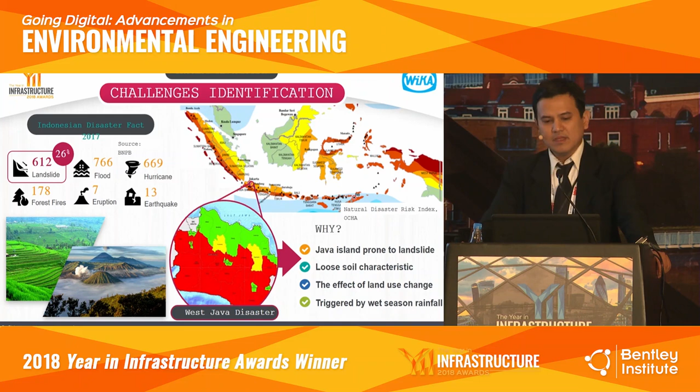If you see this map, the red color is the risky area for disaster. Based on data from the local government in 2017, there are 6 sources of natural disaster, and landslide is the third biggest cause of natural disaster.

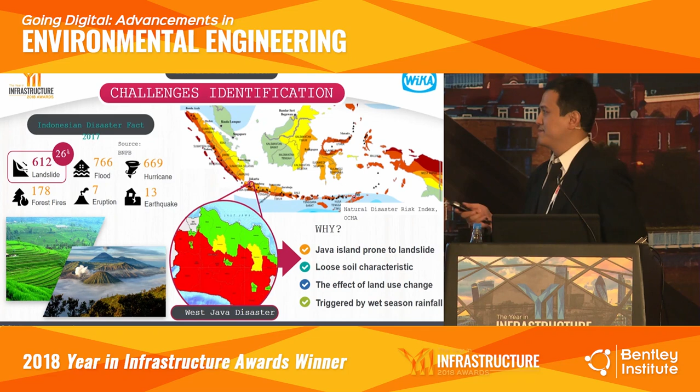Why can landslide be the third biggest cause of natural disaster? Because there are 4 causes. First, Java Island is prone to landslide. Second, loose soil characteristics. Third, the soil effect of land use change - Indonesia is a developing country, we change forest to agriculture area, we change forest to commercial area. And the last is triggered by wet season rainfall. These are the 4 reasons for so many landslide disasters in Indonesia.

Okay, next, project location. Our project location is on the existing route connecting Jakarta and West Java. This is the main route connecting Jakarta, the capital city of Indonesia, to Bandung, the capital city of the province of West Java. This is the existing route. This is the location - West Java, Indonesia.

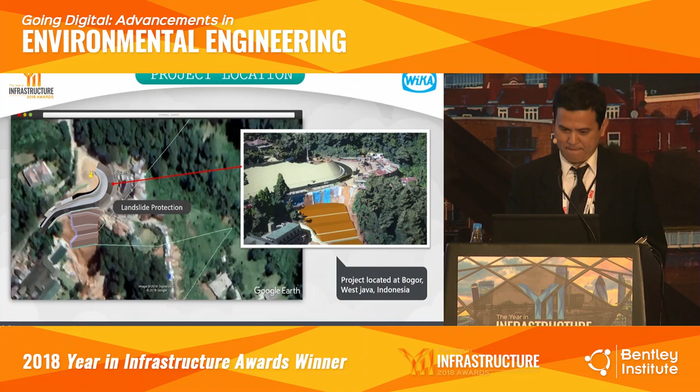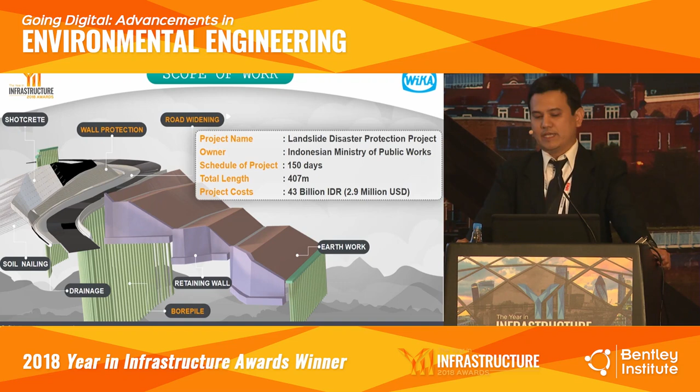Next, the scope of work. I will state again the description of the project. The owner of this project is the Ministry of Public Work. Schedule of the project is about 150 days. The project is about 43 billion rupiah, or 2.9 million US dollars. The scope of work includes retaining wall, shotcrete, wall protection, retaining wall, drainage, bore pile, and earthwork.

Okay, I will explain about the timeline. You can see this is when the disaster occurred, on the 28th of March - the landslide occurred.

Why is this project very important for us? Because 2.5 months from the disaster, we have the Homecoming Festival - in Indonesia we say Idul Fitri. This is the best event in Indonesia because we are the biggest Muslim country in the world; it's very important for us. Actually, the disaster is a small problem for us, but if we cannot construct our route, this problem could become a national disaster, because this route is the main route for people to move from Jakarta to the outskirts of Jakarta.

When the landslide occurred at the end of March, 1 or 2 days after that, the Ministry of Public Work appointed WIKA to make a feasibility study and preliminary design. In mid-April, 2 weeks later, we brought our team and started surveying and design. At the beginning of May, about 2 weeks after that, we had to start construction of the temporary road, because we needed to complete it before the Homecoming Festival. Just 1 week or 5 days before the festival, we completed our temporary route. Two weeks after Idul Fitri, we started the main structure, constructing the retaining wall. Now, in October, our productivity is about 50%, and we hope to complete this project by the end of November or early December. Totally, from the disaster until completion of construction, we need about 9 months.

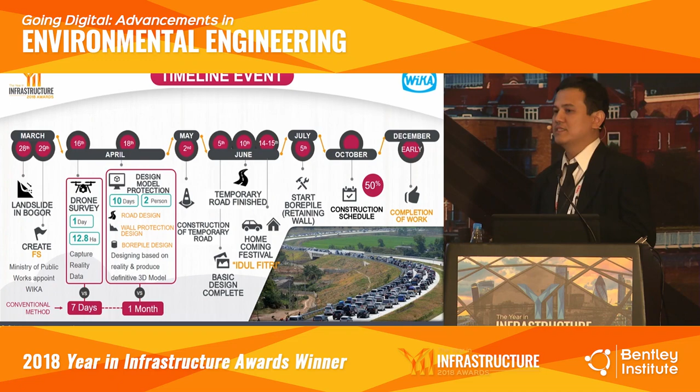4 months for design and 5 months for construction. Okay, next, what is our project challenges?

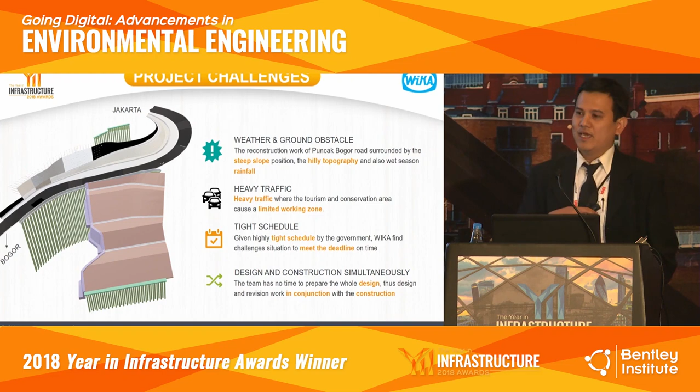There are 4 project challenges in this presentation: weather and ground obstacle, heavy traffic, tight schedule, and design and construction simultaneously. Okay, what's our goals? What is the goals from this project?

There are 5 goals: 3 reducing, 1 minimizing, 1 increasing. Reducing the project design schedule, reducing the site risk, reducing the project design cost, minimizing impact of manpower turnover, and last is increasing amount of infrastructure project.

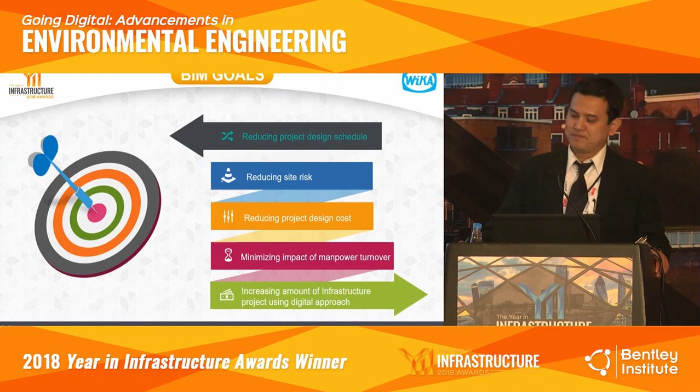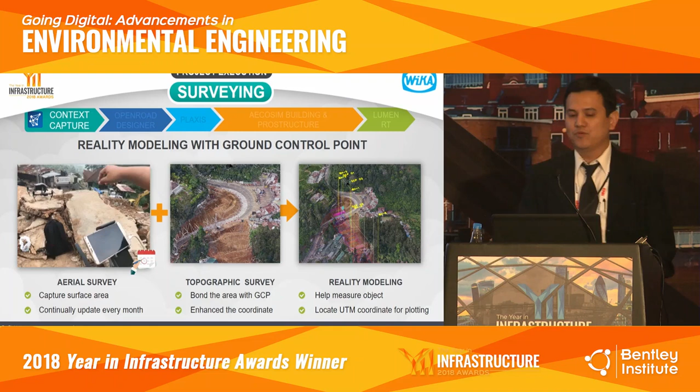Okay, next, this is the project execution. We divide project execution into 5 stages. The first is surveying. We use BIM ContextCapture to make surveying, with aerial surveying plus topographic surveying, we get reality modeling here.

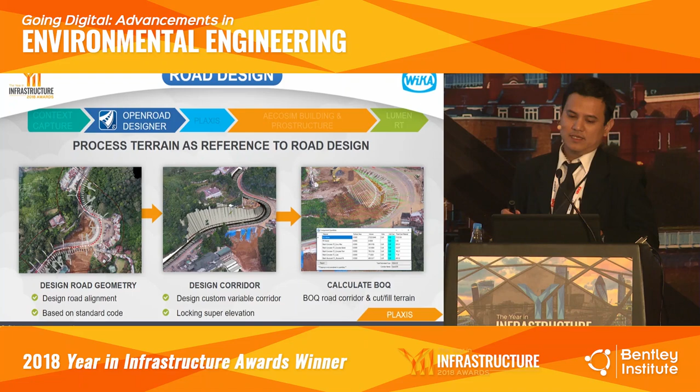And then, for design route, we use OpenRoads Designer. With OpenRoads Designer, we design road alignment, vertically and horizontally. We design the corridor, and then we get the preliminary bill of quantity.

And next, Plaxis. I'm a master of Plaxis. I have used this software from 15 years ago. When I heard that Bentley acquired Plaxis, I was very happy. Okay, with Plaxis, we can make a design by staging. This is the point.

Okay, we can make analysis. We can make analysis for the bore pile. We can make analysis for the landslide. And after we get the bending moment, the safety factor, we can make our design.

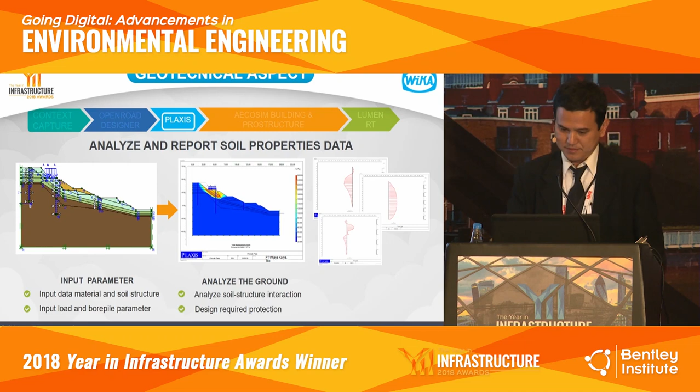Next, for AECOsim Building and ProStructure, we can produce the 2D and 3D drawing. With 2D drawing, we can produce the detailed engineering drawing. We can also produce a 3D model here.

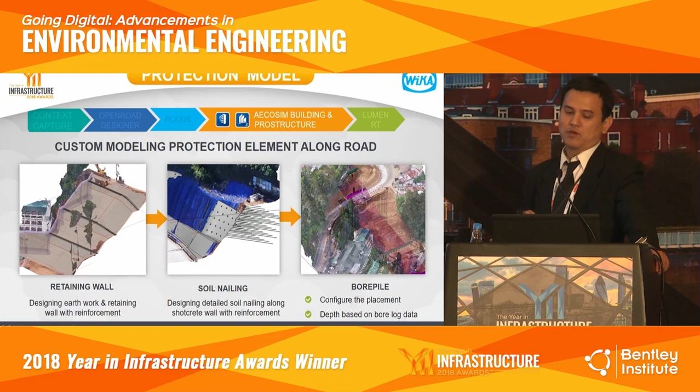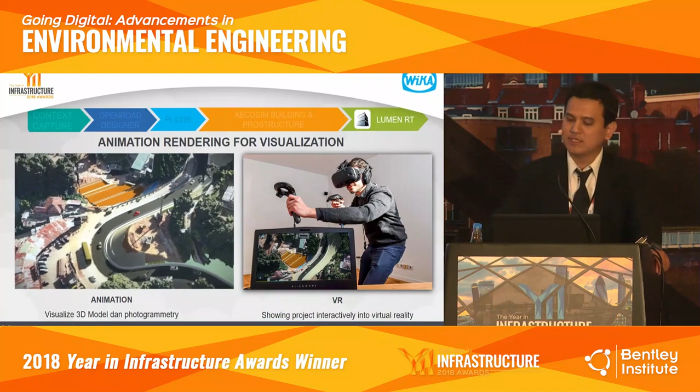Okay, next, the last is with LumenRT. With LumenRT, we can visualize the 3D model and photogrammetry. And then we can make a virtual reality to show the project interactively. You can see this, we can make animation.

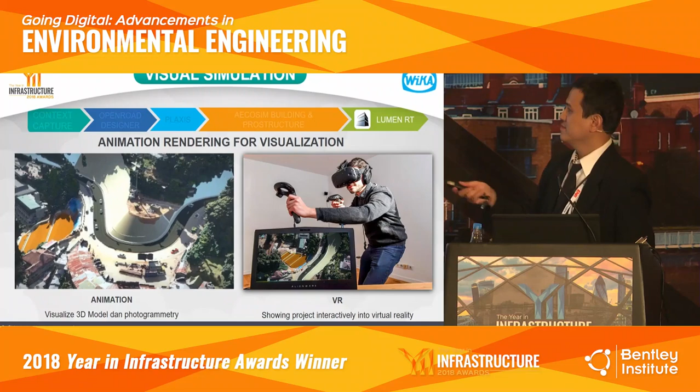We can make 3D model and visualization. We can get the volume. You can see that we can save our cost for design about 20%. Only with 1.5 weeks, we can complete our design.

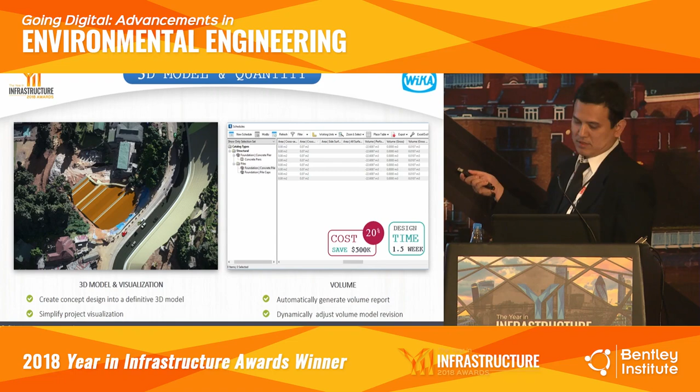And then, clash detection and navigation, you see this, we can get the clash detection. We can get a clash between the soil nailing and retaining wall here. For the clash detection, we can save our cost about 5% here. And then for site navigation, used for viewing, modeling, and identifying elements, and monitoring real-time progress easily.

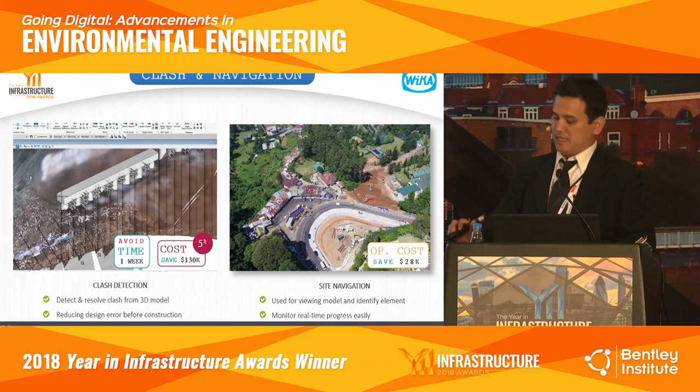Okay, the last is conclusion. I will state again the summaries in this project. Bentley BIM can integrate its process from surveying, geotechnic, civil structure during the design process, and then using comprehensive BIM capability software solutions in road, structure, and geotechnic.

The third is design and construction work simultaneously, because we don't have time to do this project in normal conditions. This is the extraordinary condition. We have to do design and construction simultaneously. And then we can detect the clash and resolve design issues before the construction begins.

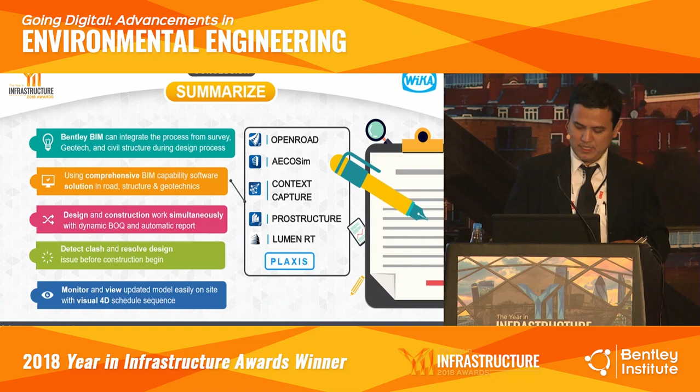For the last, monitor and view update model easily on site with visual 4D schedule sequences. The key point is optimization, efficiency in cost, time, and quality.

For cost, we can optimize and get efficiency about 25% here. In time, we can speed up and expedite design and construction by more than 3% - I think we save about 3 months. And for the quality, we get more accurate actual design results and better looks.

This is the lesson learned: with the digital approach, we can optimize the cost, speed up the project schedule, get the accurate design, and Bentley BIM is the right solution to face this challenge.

The last thing I can say again, in this project, we can get better, faster, and cheaper. I think that's all my presentation. Thank you for your attention.